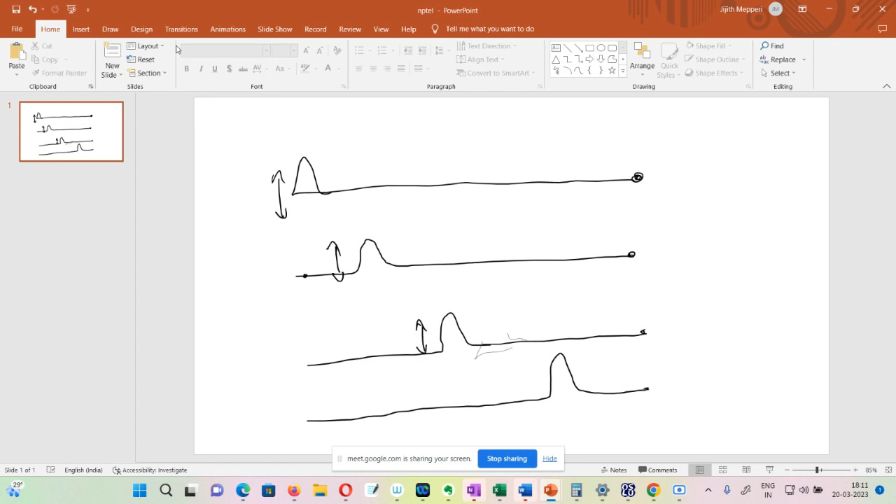What is a plane wave? A plane wave is a wave which is considered such that when it is moving, the whole portion on the plane has the same phase or same amplitude. You can see that - a plane wave, you people know wave, whatever wave - when you are thinking about a wave, everybody will tell about a sine wave kind of thing.

What is it actually representing? You can easily represent it like a wave in a thread or something. But most simple waves can be represented in terms of a sinusoidal wave - either the displacement of a thread, or the variation of pressure, or the variation of stress, or something like that.

So what they are saying is that it has an amplitude part and a propagation direction. And the wave equation is represented by an equation which has both the spatial part as well as the temporal part, the time part. So they are saying that if a wave is moving like that, this point and this point have exactly the same amplitude, and similarly this point and this point have the same amplitude, and the distance between these two portions is what we call the wavelength if it is in the spatial domain.

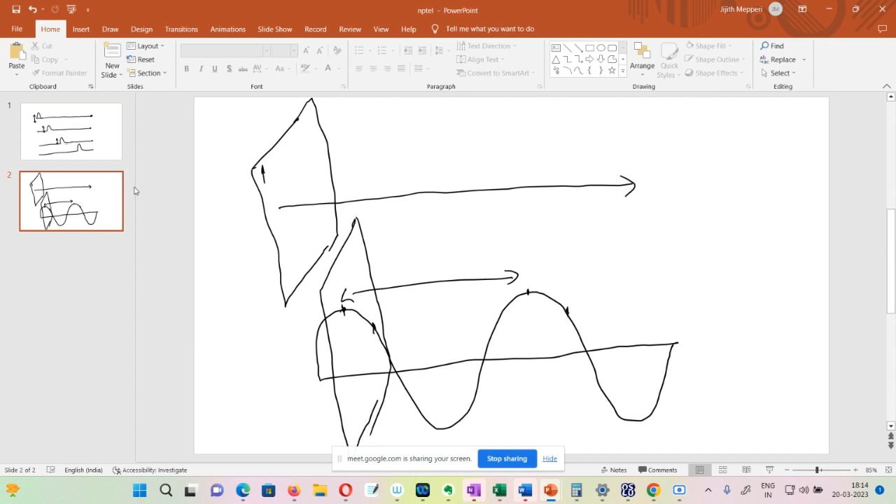So what they are saying is that if it is a plane wave, all portions in that particular plane will have the same amplitude. If this point is in that plane, then everything in this plane will have the same value, and that plane is not fixed by a boundary - it is like an infinite plane, spanning the whole space. So it is a simple entity which we can use, and we can say one plane is moving from one side to another side, like that you can imagine, and that will be easier. But that will not be an ideal situation.

So then other different kinds of waves emerged. This is the plane - so the plane is moving, and it can move like - you can see that when a stone is dropped in a pond, the movement will be circular. Just think that that is happening in space, that will make a sphere. So a wave can move in the shape of a sphere, concentric spheres it can move. So that's the concept of a spherical wave also, which is more towards the real situation.

Then only we are now thinking about Gaussian waves. What are Gaussian waves?

Why is it called Gaussian? Is it the phase distribution that's in Gaussian form? Actually, the phase distribution is not Gaussian. Actually, the cross-sectional amplitude distribution is Gaussian.

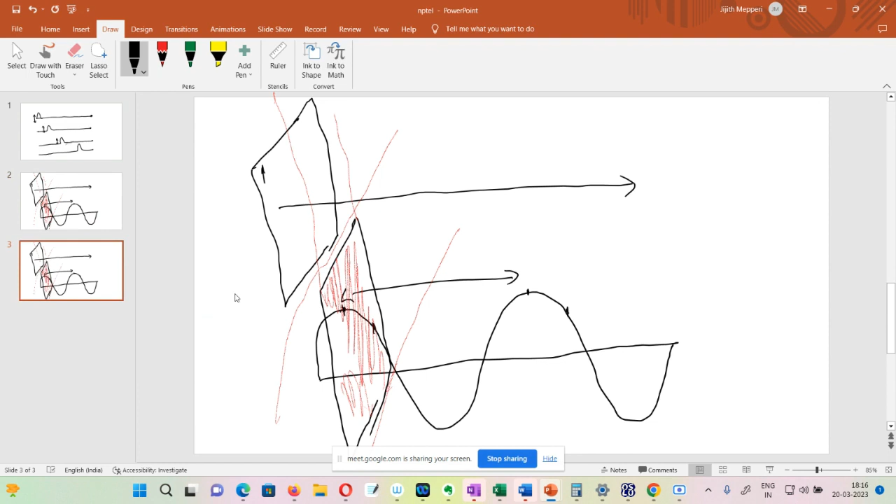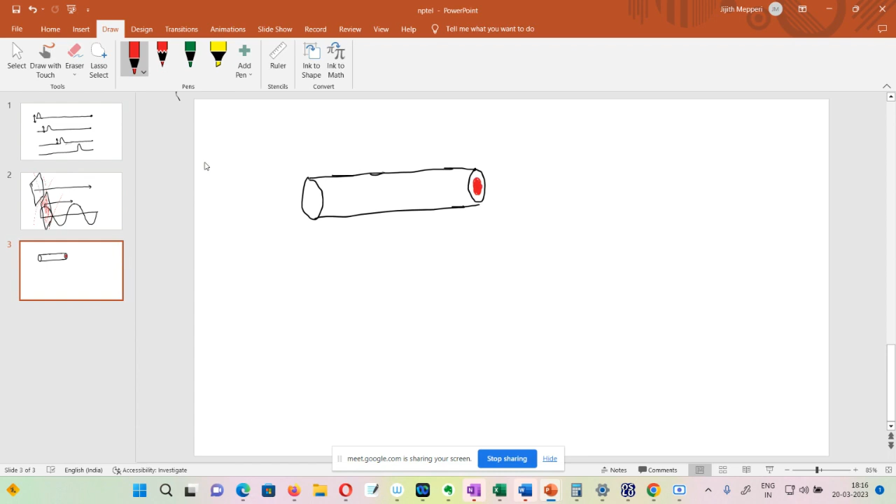You don't need to think too much about waves and other things, just think of a practical concept. You all know a laser beam. And the course said it is Gaussian in nature. Just think that I have a laser diode or laser equipment. It will have an aperture from where the laser is coming. From here, actually, the laser is coming, and a laser beam comes out.

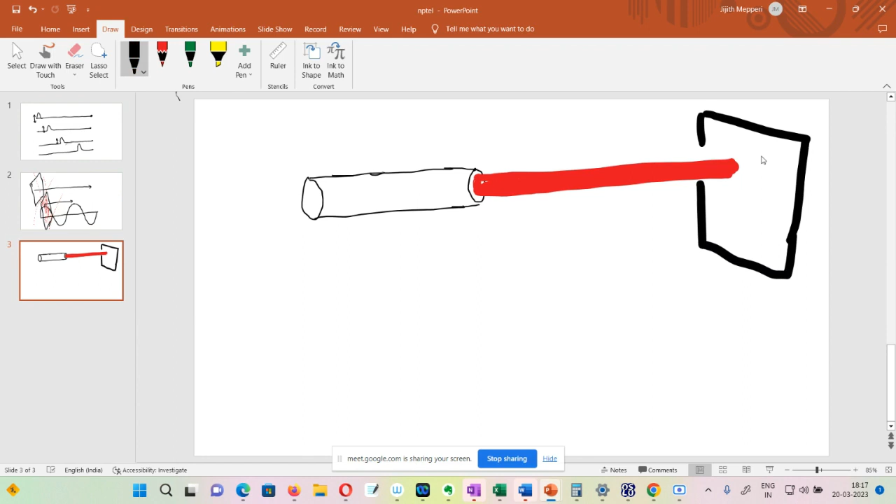You spot it on a paper or something. How does the laser spot look on the paper? If your paper is something like this, you will see some circular spot. This is what you are seeing in the case of a laser beam spotted on paper. But if you look at this spot in a more thorough manner, you will come to know it is not uniform everywhere, like I drew. But look at a laser beam, and you will see it is not going to be a uniform spot.

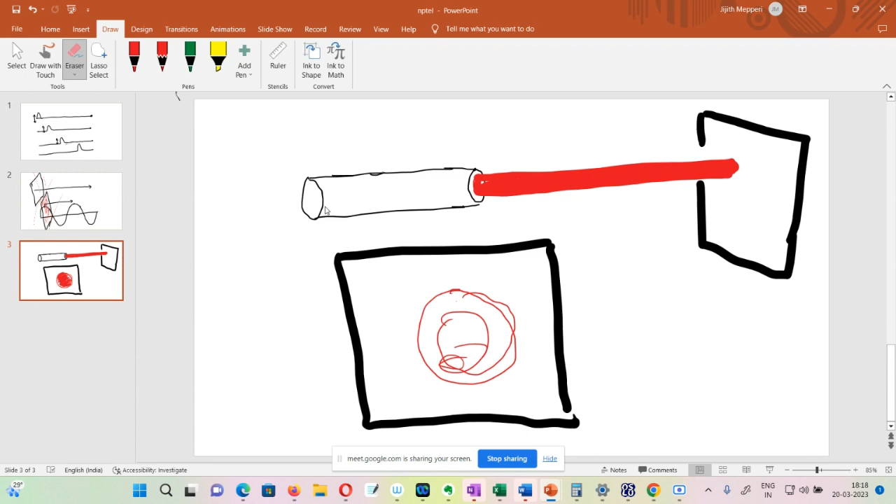You can see that the central portion will be very intense. So when you look at a laser beam coming, or just put it on a paper and see, the central portion will be very thick, meaning very intense. And the outside portion will be less intense, less intense, less intense, like that. It will be something like this.

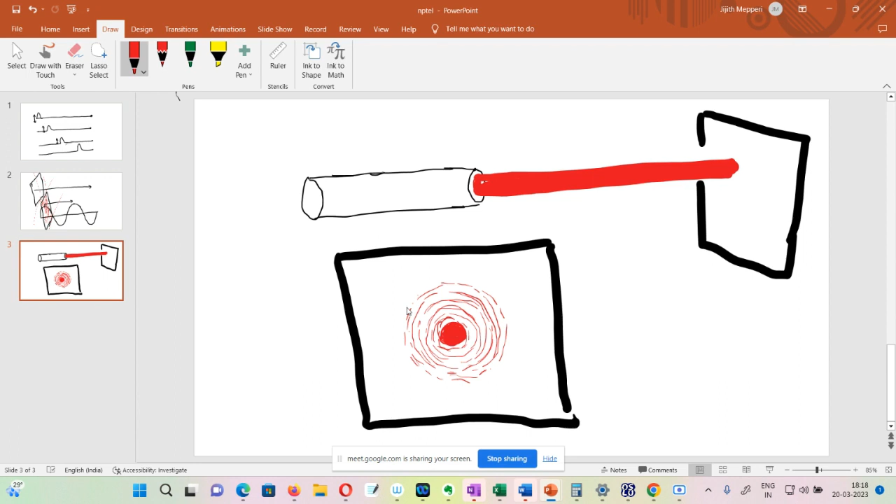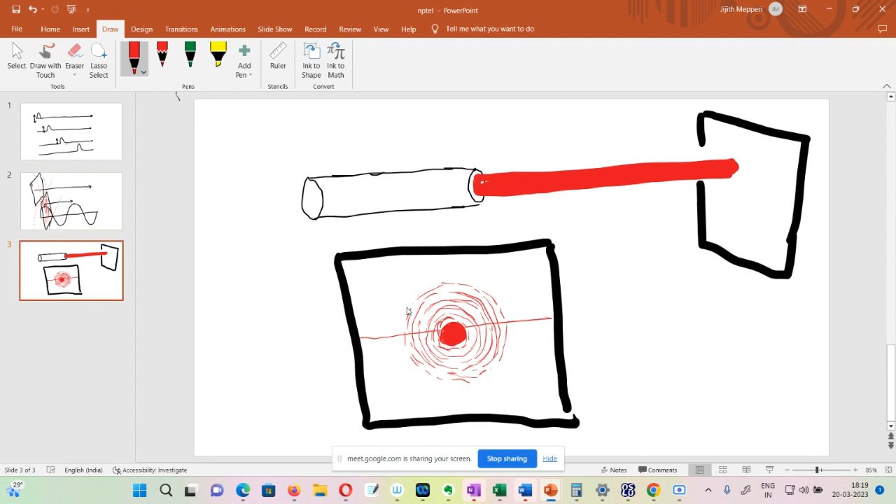Now you calculate the intensity across this spatial direction. What will come? I'm going to plot the intensity across this graph. This is my position: 0, 1, 2, 3, 4, 5, 6, 7, 8, 9, 10. So how will be my intensity at 0? This will be very less. At 1, slight increase. At 2, some more increase. At 3, more. At 4, very intense. At 5, again decreased. At 6, decreased. At 7, decreased. At 8, decreased. At 9, decreased. At 10, it's going like that.

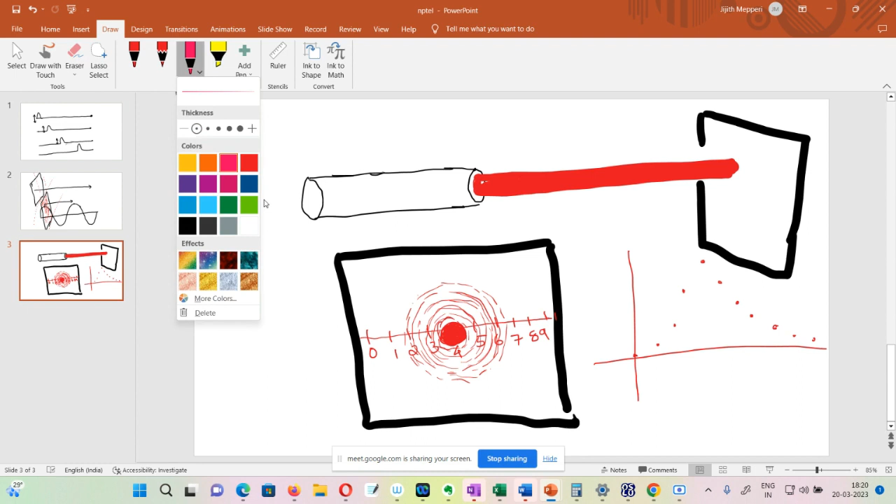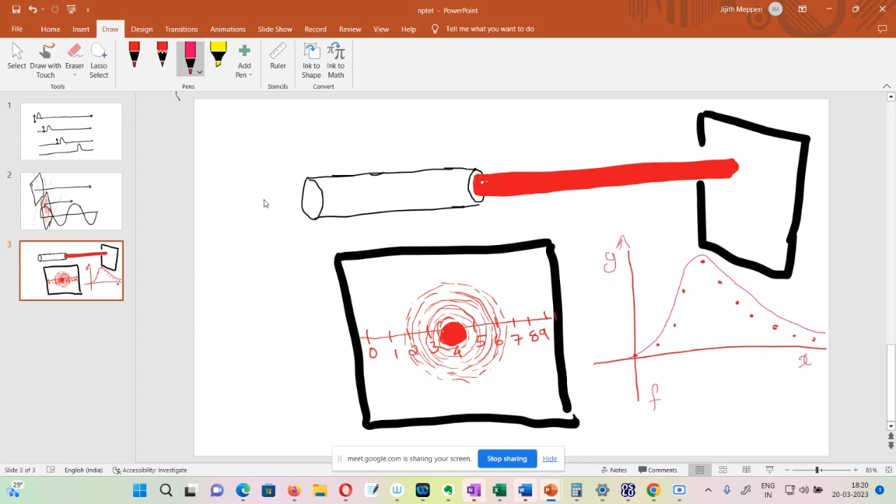And if you connect these points, you will get a shape like this. The intensity variation across the spatial dimension is in this shape, and you can equate this shape with a particular function. This is y and this is x. I can give it as a function like f(x) equals some k into exponential minus a x-squared kind of thing. If you have a function like exponential minus x-squared, the shape will be like this. And this particular shape is called Gaussian.

Why is it called Gaussian? This is actually named in the memory of a famous mathematician called Carl Friedrich Gauss. And this distribution is a very common distribution, so this type of distribution is coming. So your laser beam is in the form of a Gaussian distribution. What is the distribution? The distribution of the intensity or the amplitude of the beam in the spatial direction, or the perpendicular direction, you can say. That is why it is called a Gaussian distribution.

Got it? So it is not the phase that is in the form of Gaussian. It is actually the spatial, or perpendicular spatial, distribution of the intensity or amplitude that is in the form of a Gaussian.

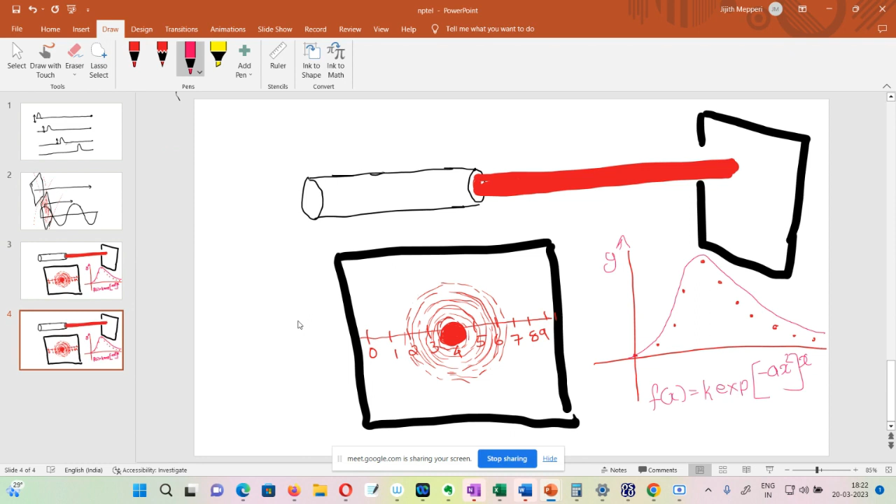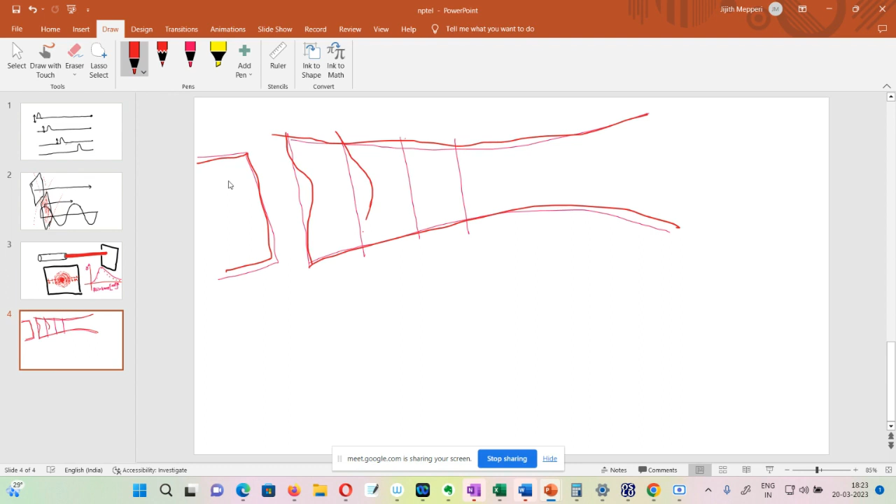Now you can go through the different concepts of a Gaussian, and you can see that the Gaussian beam will have a self-focusing property also. So if it's a Gaussian beam, it will have this kind of profile, and each plane is actually represented by a Gaussian distribution. This is my laser output, and the laser is coming like this way. If you look at a different position, you can see the intensity will be something like this: the middle portion intensity will be high and the end portion intensity will be low. That's the meaning, something like that.

This is the thing of the Gaussian. And we said that there is a plane wave. In the case of a plane wave, we can see that exactly all things are in phase. All the particles in the plane are in phase. But in the case of a Gaussian, there is a phase delay compared with the plane wave. So that is the question which they are asking. In the case of a Gaussian, there will be a phase delay.

So if you're checking that Gaussian beam, you can see that, okay, if the middle portion is something like this, and after some time, if the plane wave is exactly like this, the Gaussian will have a phase delay of something like this. And as it is moving, it will be like something. It will not be this big, but yes, there will be a phase delay. This is the property of a Gaussian beam. And how can we calculate that?

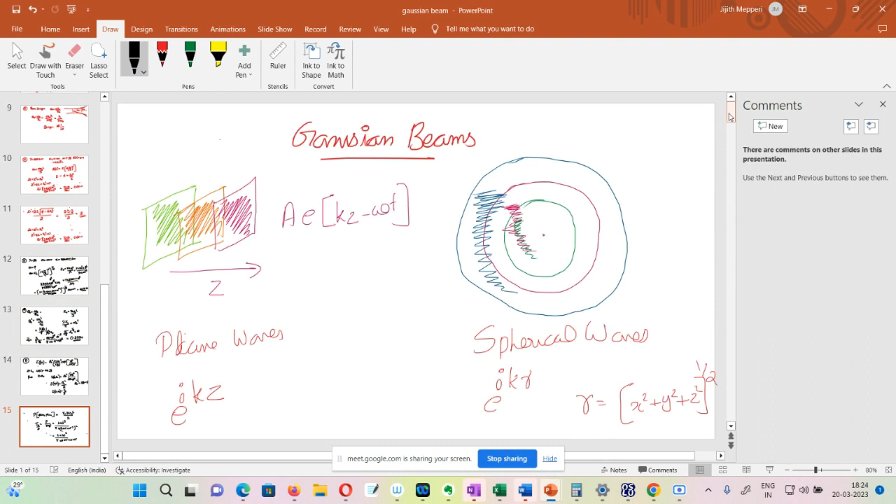So we have the original expression of a Gaussian beam. Okay, what is the original expression of a Gaussian beam? Electric field will be equal to amplitude omega naught by omega z, exponential minus rho square by omega square z, into exponential minus ikz minus ik rho square divided by 2R z plus i zeta z.

Is there any doubt in this portion? You don't need to worry how it is coming and other things. You just have to remember that this is the Gaussian beam expression, this is the amplitude part and this is the phase part. Sir, I had a doubt about what that zeta function does. When ma'am explained, I didn't understand.

Yeah, now there is an ikz minus some rho square by 2Rz, plus that extra term. So what does that do? Yeah, that I'm saying. You see this rho square portion is actually giving the phase distribution along the perpendicular direction. Rho square is actually x square plus y square. Okay, sir. I will tell you.

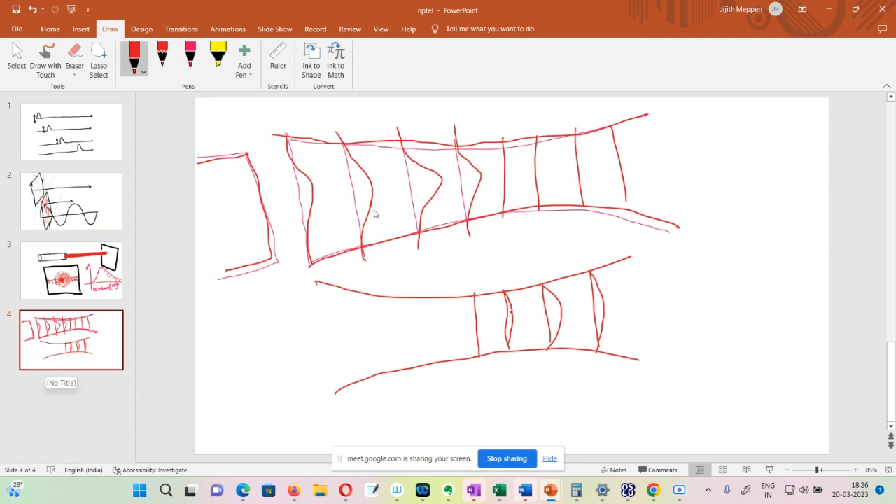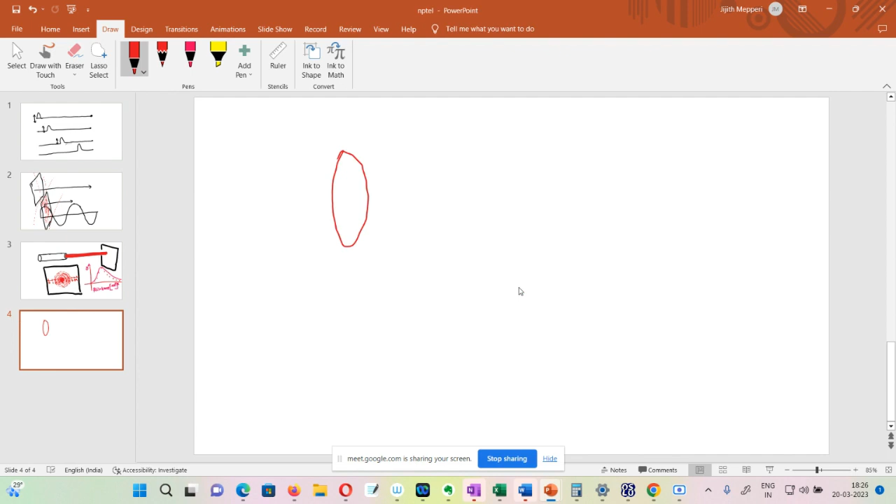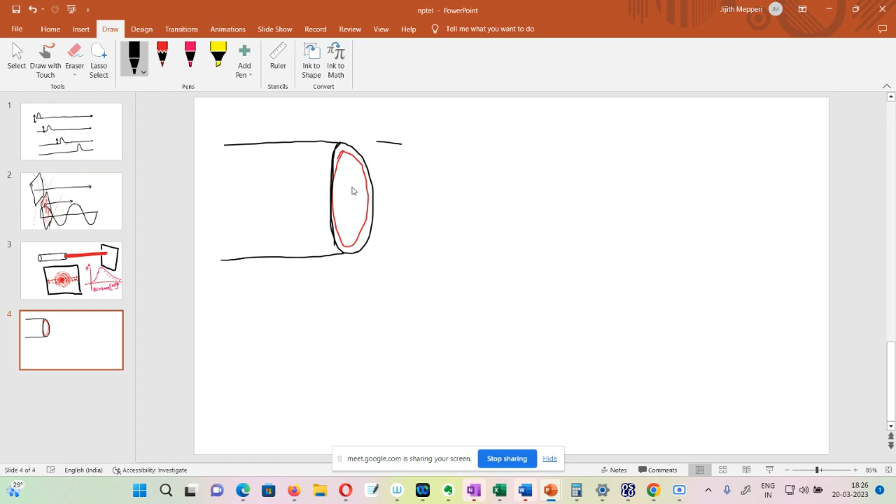Now, this is a laser beam, a laser diode. Okay, this is a laser diode, and a beam is coming from here. It will be like a Gaussian beam, coming this way. And you can see that it will be composed of different planes. One plane, another plane. It's not a separate plane, it's a continuous thing. I'm just saying that you can consider this as different planes.

Okay, and each distribution is a Gaussian distribution. If you take a line here, you can see that this intensity will be higher and the side intensity will be lower. The middle portion intensity will be higher, the side will be lower. Here also like that, and here also like that.

So now you see that this is a full beam just coming out of the laser, but it is like a three-dimensional thing, like a pipe. If you just equate it with a pipe, it has a z directional path as well as an xy directional path. This is the xy directional path. This is the z directional path. Along the pipe it is z, and perpendicular to the pipe it is xy.

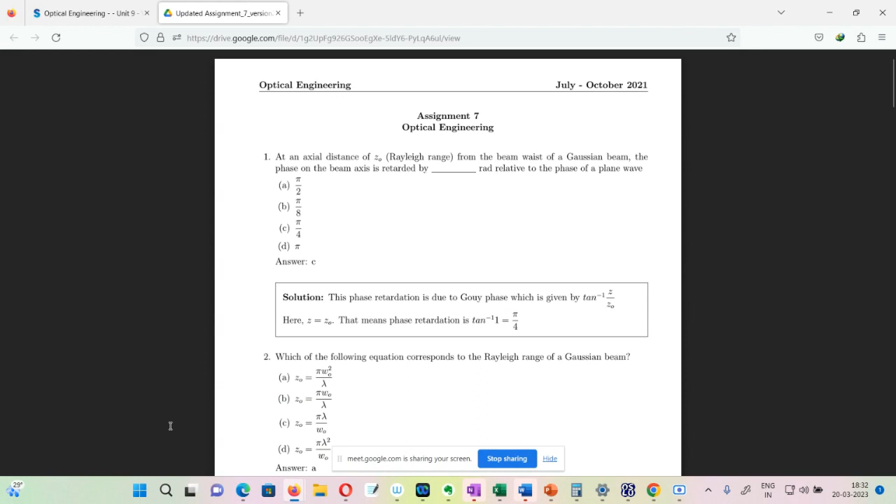Now, which of the following equations corresponds to the Rayleigh range of a Gaussian beam? A Gaussian beam has different parameters, and one of them is its Rayleigh range. What is the Rayleigh range? Rayleigh range is a distance at which you can see the variation of your curvature, a maximum, how a Gaussian beam is changing from a plane wave.

You can see how it changes from plane to spherical, and at a very far away distance it is again like a plane wave, and that variation is characterized by your Rayleigh range. The Rayleigh range is defined as z naught is equal to pi omega naught square divided by lambda. Okay, and now you see

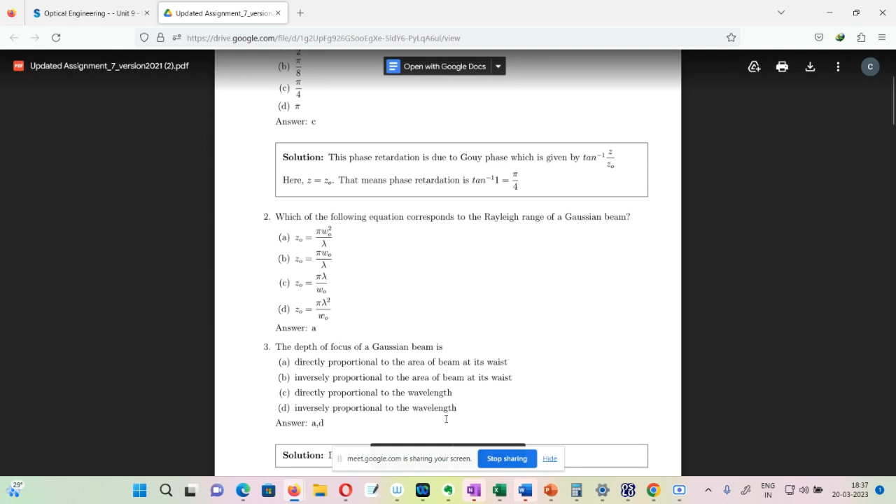So proportional to the area of the beam at its waist, that's true. Inversely proportional to the area, that's false. Directly proportional to the wavelength, that's false. Inversely proportional to the wavelength, that's true. So A and D are true.

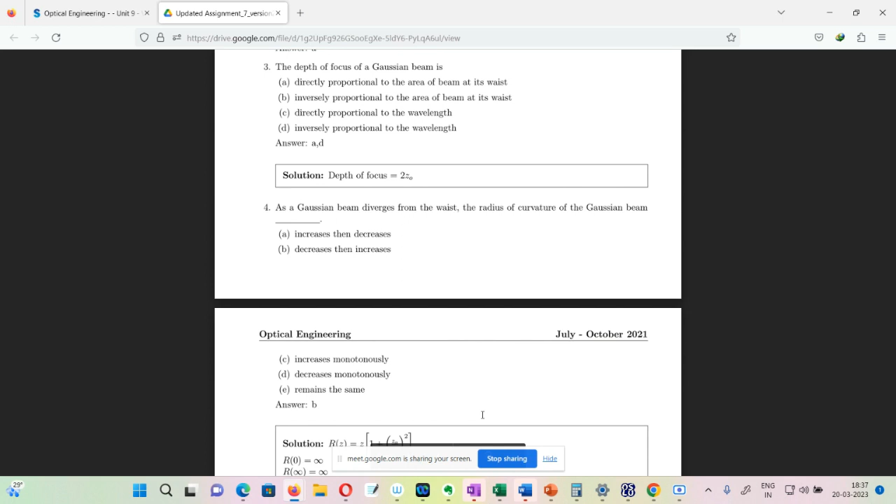Let's see. As a Gaussian beam diverges from its waist, what happens to the radius of curvature of the Gaussian beam? I'm not opening this one. Just tell me, what is the equation of the radius of curvature of a Gaussian beam starting from its focus point, or the beam waist? What is the equation? R of z is equal to z into 1 plus z naught by z, the whole square.

So now, if you want to see how it is happening, you can calculate in a very analytical manner, but you don't have to. If you want to get your answer easily, you can calculate this way. R of z is equal to z into 1 plus z naught by z the whole square. Or you can multiply it out, take the z inside, and it will be z plus z naught square by z. Okay.

Now see what happens at your beam waist, where z is equal to 0. Here it will be 0 plus z naught square by 0, which will be a very big value. Correct? Yes, sir. So it is a very big value plus 0, which is like infinity. So at z equal to 0, R of z is infinity. Radius of curvature is infinity, which means it is a plane.

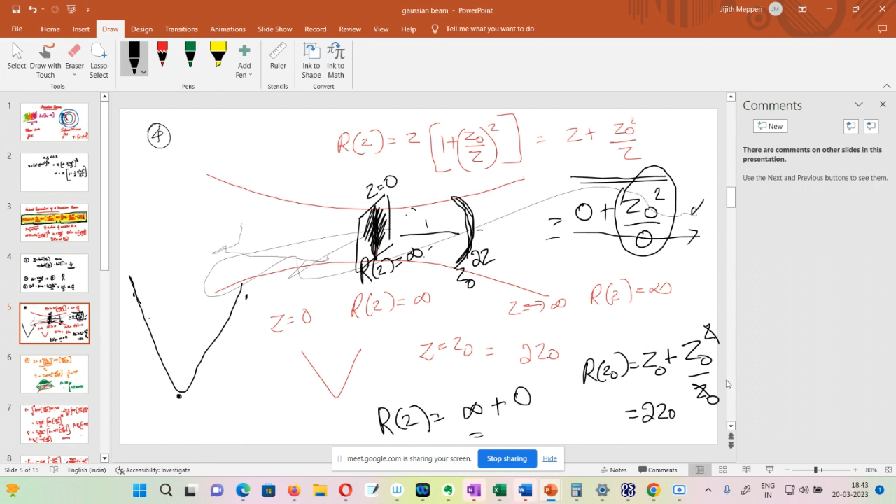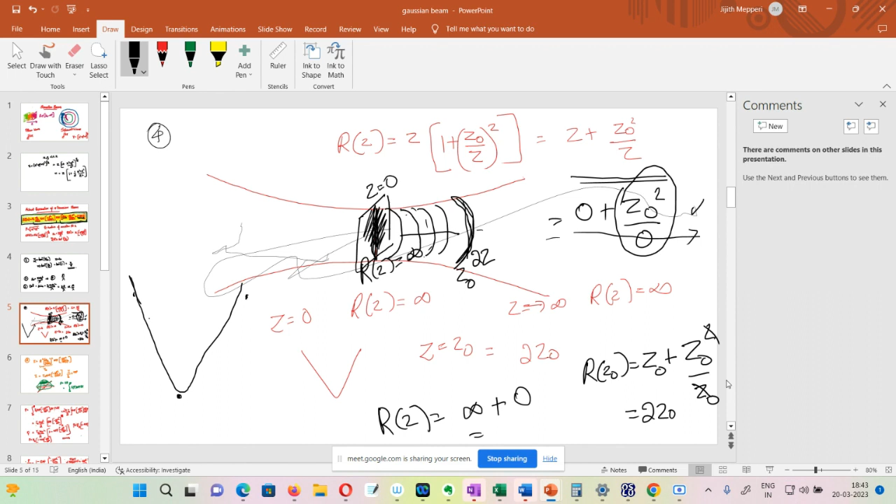Radius of curvature is here. So it will have a plane nature here. Then it will have a very high radius of curvature, and it is decreasing. Then again after some time, what happens? This curvature will again, sorry, increase, and when it is far away, it again looks like a plane.

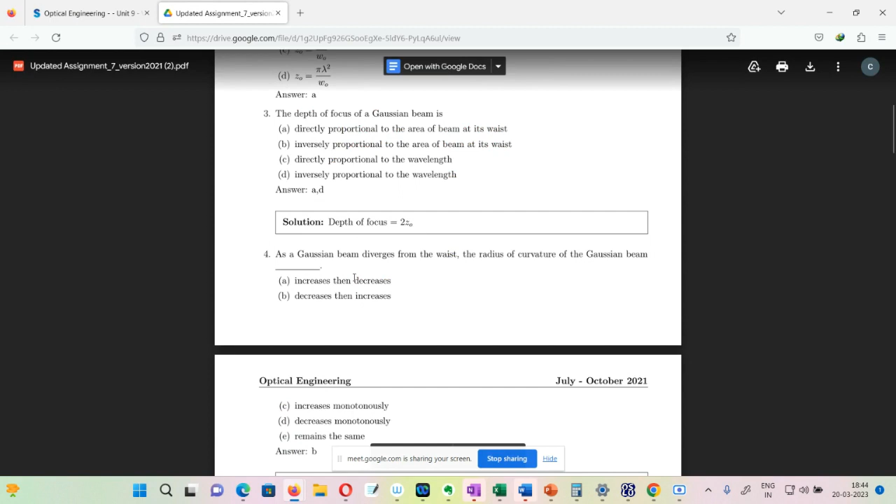So starting from 0, it is plane. Then from high, it will come and go down, and at z naught, it will come to a minimum position. Then again, the radius of curvature starts increasing, and it will become again like a plane. Okay, so fine. So you can see that it increases, decreases, then increases.

Now, from 5 onwards, our mathematics actually starts. The radius of the Gaussian beam within which 99% of its total power is contained. You know how to calculate this one? Actually, it is done in class also, I think. Okay? Yes, sir. That was learned in class.

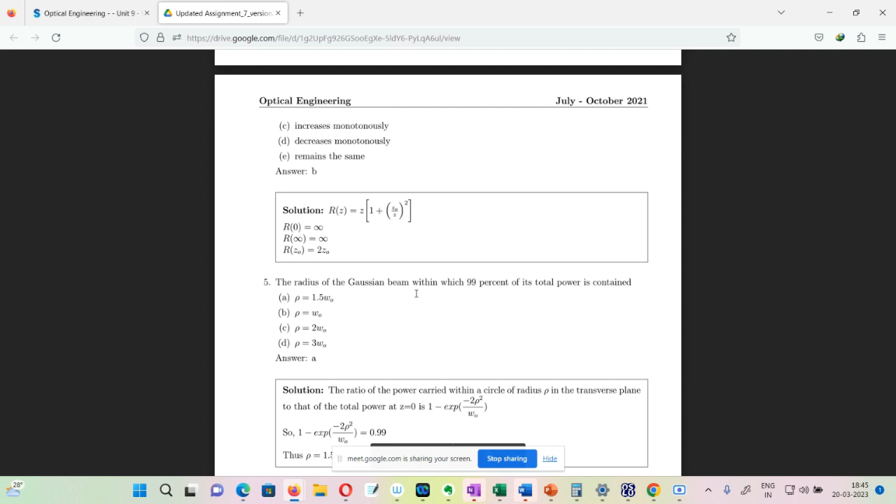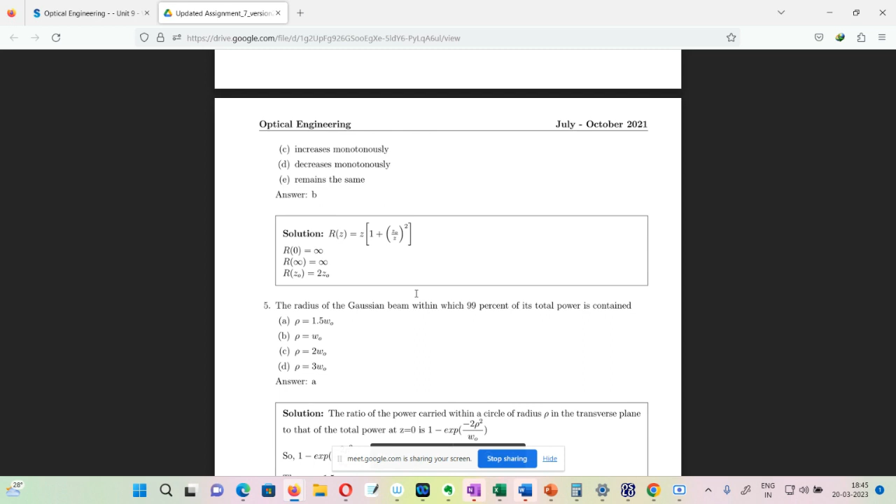Yeah. You want clarification for this one? How the power is calculated, how the 2 pi r is coming? Madam made the calculations and showed, one is 86%, another is 99. Yes. So that is sufficient. Whether I have to explain again, or if you want, I can explain, no problem. Okay, sir.

What is this i? That's the imaginary. This is a complex term actually. This wave function is actually a complex function containing both a real as well as an imaginary part. And you are seeing a beam or laser beam now. Can you actually measure or see how the electric field is behaving? Can we see or detect an electric field?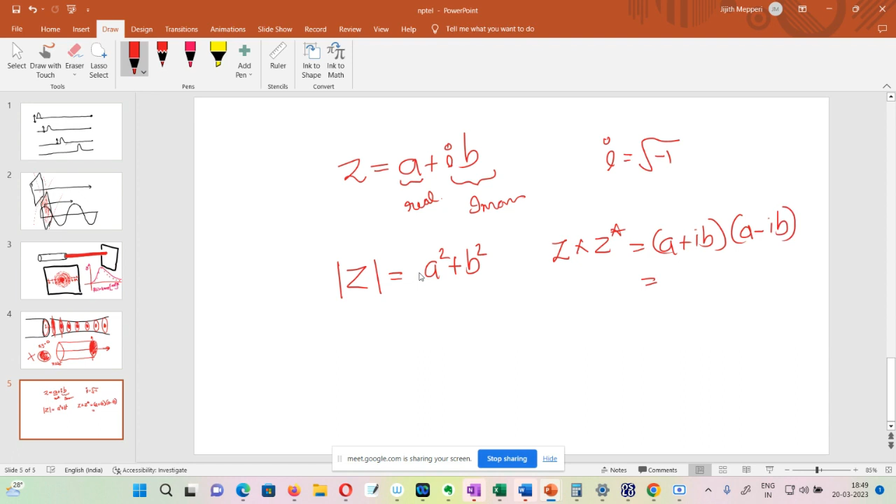So a square minus i square b square, and i square is minus 1, so it becomes a square minus minus 1 b square, which makes a square plus b square. Okay. This is one representation of a complex term. Similarly, there is another representation of a complex term also.

Now the same complex number I can represent in terms of an exponential term. z I can represent as r into e raised to i theta. Okay. A radial representation of this one. And e raised to i theta is cos theta plus i sin theta. Okay. e raised to i theta is equal to cos theta plus i sin theta. Now we just see.

I am saying that I can represent a complex number in terms of r e raised to i theta, and e raised to i theta is equal to cos theta plus i sin theta. So I can write r into cos theta plus i sin theta. So it will be like r cos theta plus i into r sin theta. Now it is looking like a plus ib, correct?

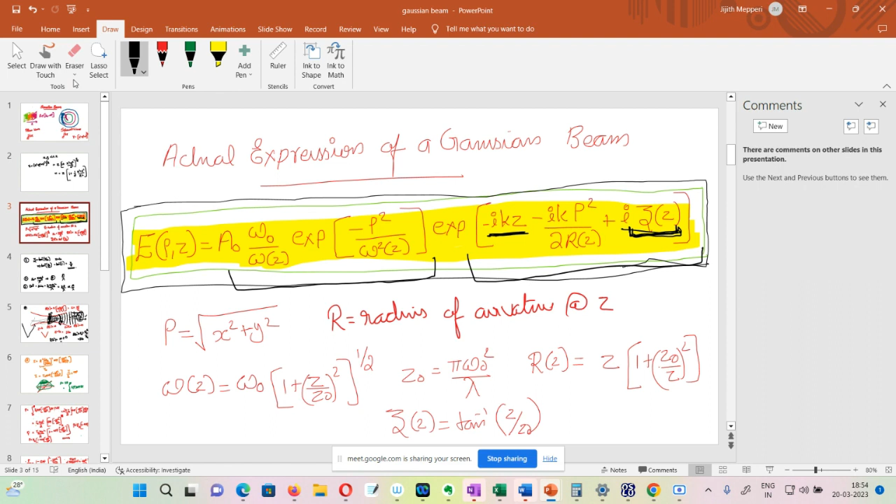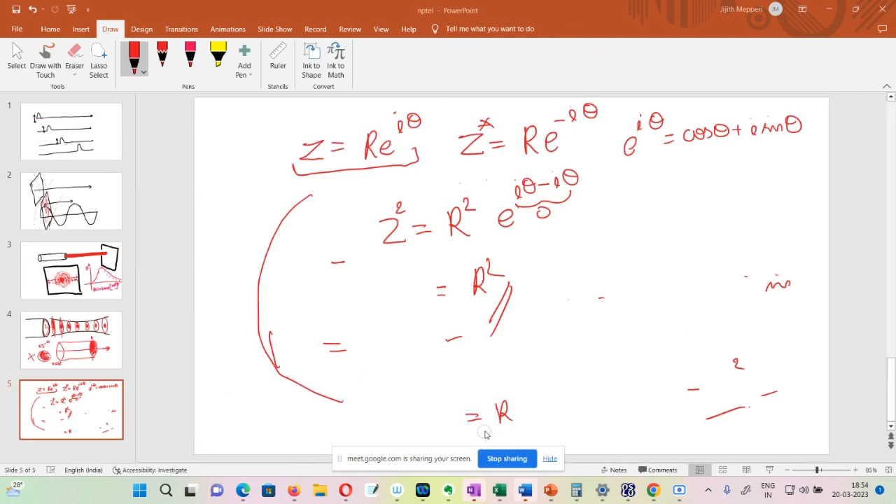So what will happen when you are taking a modulus square? Actually, what is your intensity? Intensity will be E into E star. So this term will be as it is. Now you see, this term will be as it is. What will happen is E star. I took E star of rho, z.

It will be A0 omega naught by omega(z) exponential minus rho square by omega square of z into exponential. What will happen? The sign will change. It will be exponential of ikz plus ik rho square by 2R(z) minus i zeta(z). Now what you have to do? You have to multiply this together.

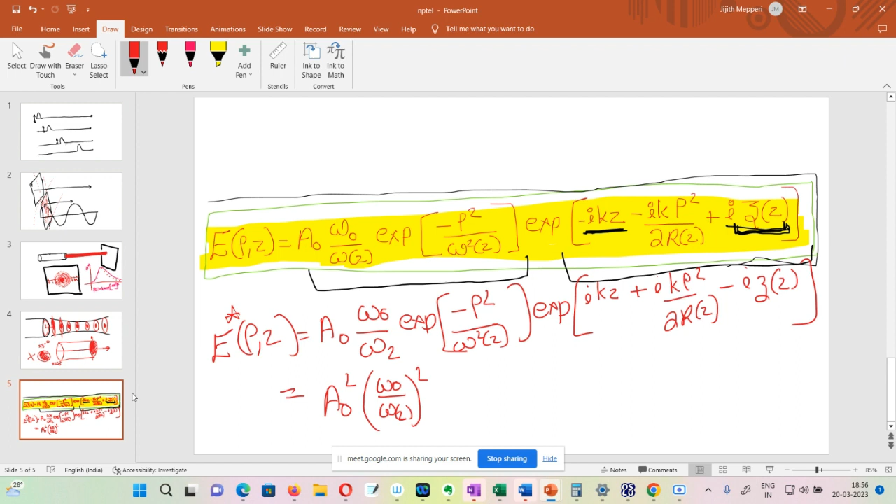What will happen? A naught into A naught will become A naught square. Omega naught by omega(z) into omega naught by omega(z) will become omega naught by omega(z) the whole square. Exponential something into exponential something, the exponent will be multiplied by 2. So exponential of minus 2 rho square by omega(z) square.

What happened in this multiplication? This is minus ikz plus ikz, it will get cancelled. This is minus ik rho square by 2R(z), this is plus ik rho square by 2R(z), that gets cancelled. This is plus i zeta(z), this is minus i zeta(z), this will cancel. And this exponential term will contain an exponential of 0, so that will be 1.

So if you multiply it, if you are taking an intensity, what are you getting? You are getting the square of this amplitude part only. This is actually the real issue which we are facing everywhere. We are saying that all light is traveling in terms of electromagnetic waves or electromagnetic field.

This electromagnetic field is a complex term containing an intensity or amplitude part, which is real, and a phase part, which is imaginary. But our eye or camera detector cannot differentiate this phase part. So whenever you are taking an image, the phase is lost, and whenever you are seeing an image, the phase representation is lost.

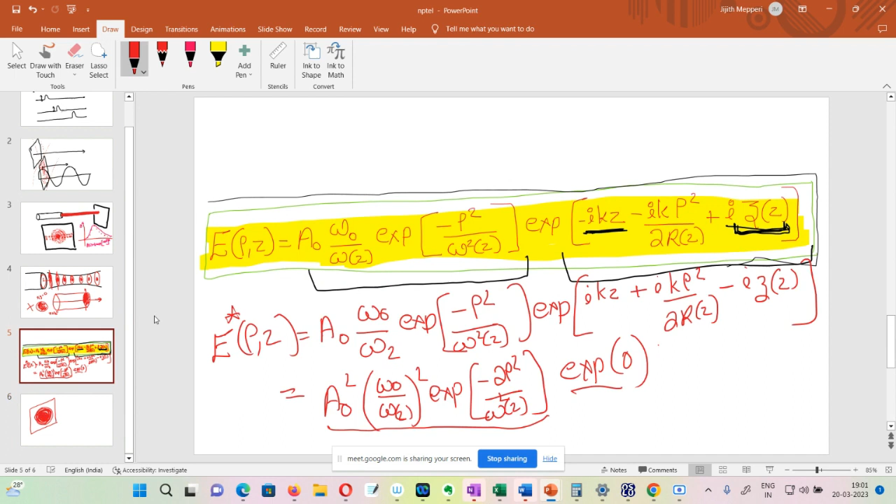This portion will be having a high value, because you can see the rho square by omega naught square z term. So if you have a value of this thing, it contains a lot - this direction is the z direction, and this will be like the x and y direction. Based on the x, y, and z direction, it will have a particular value. If you want the value at this position, take the z value.

If it is actually at the beam waist, then z value will be 0. Sometimes this plane may not be exactly at the beam waist. Just think you are taking a plane at this position, then here the z value will be 0. Now think I am taking a plane at this position - here the z value will not be 0, it will have a particular value, maybe like 2 or 3 or something. So it depends on which plane you are taking, the z value varies.

And depending on what point you are taking, your x and y value will vary. So it will be a function of x, y, and z, and it gives a particular value at a particular point. Got it?

Now you only know the value at a particular point - that's all you are going to know. But now you want to know the full value. What you have to do is calculate this position, this position, this position, like that - you have to calculate the whole position. Actually this is not at all going to end, it's like intensity is decreasing only, it will keep going like infinity.

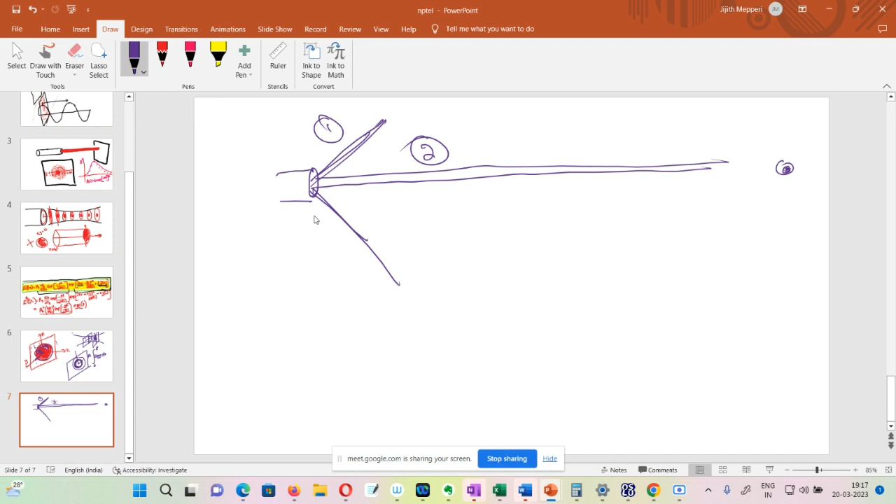Now think that I have a laser beam that diverges. And I want to reach some very far away distance. If the laser is diverging like this way, will it reach there with full power, or if it is very sharp, which is better, this one or this one? The second one. The second one is always better.

So now, what is the difference between this beam and this beam? This beam has a higher divergence, and this beam has a lower divergence. So I want a beam having a lower divergence. Now we can directly go check what is the parameter which decides the divergence. What's the parameter that decides the divergence?

Beam divergence theta is defined as omega naught by z naught. By seeing this, we may think that if we increase omega naught, divergence will increase. If omega naught, or the beam size, is increased, divergence may increase. But no, why? Because there is a z naught here.

Z naught is not a constant. It's a constant for that particular beam, but it is not independent of omega naught. Actually, z naught is equal to pi omega naught square by lambda. So z naught has an omega naught square term.

So it will be like theta naught is equal to omega naught by z naught, or omega naught lambda divided by pi omega naught square. So it will be like lambda by pi omega naught. Lambda is a constant, pi is a constant. Now omega naught is coming at denominator, so theta is inversely proportional to omega naught. By seeing this, don't think theta is directly proportional to omega naught, because z naught contains an omega naught square term. So the net effect is theta is inversely proportional to omega naught.

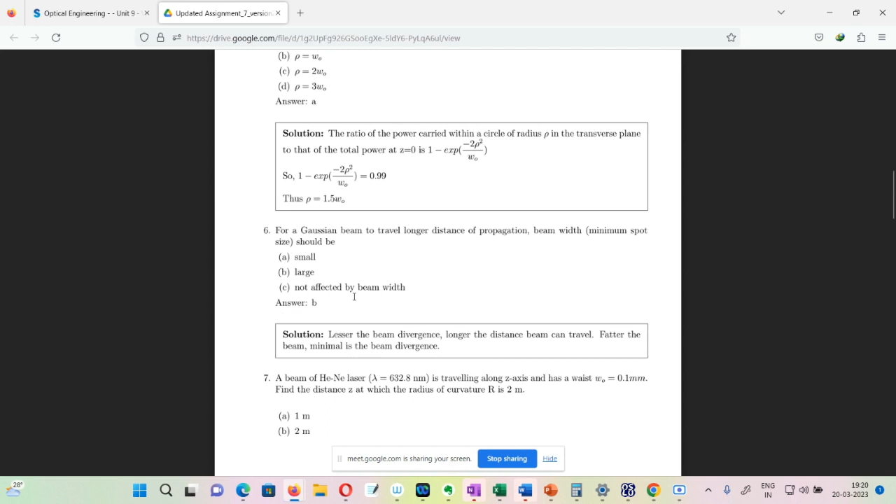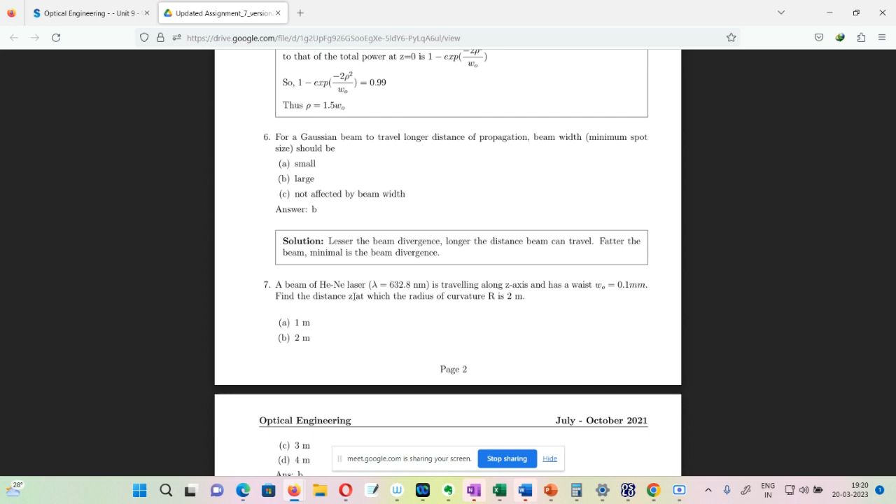A beam of helium neon laser, 632.8 nanometer, travels along a z-axis and has a waist of 0.1 millimeter. Find the distance z at which its radius of curvature R is 2 meters. How will we do this? We have a direct equation. Radius of curvature R is equal to z into 1 plus z naught by z, the whole square. You can directly put that equation there.

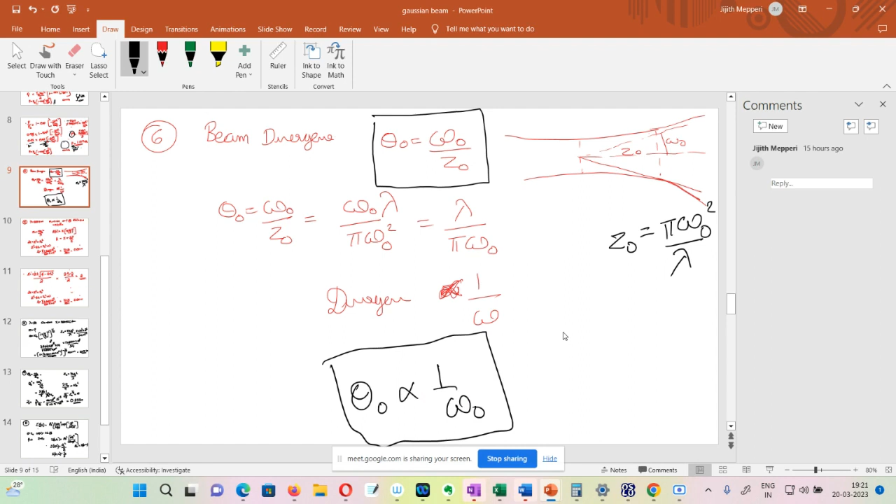Now you see the question. Lambda is given as 632.8. Omega naught is given as 0.1 millimeter, or 0.1 into 10 raised to minus 3 meter. Z we don't know. Radius of curvature is equal to 2 meter. So we have the equation R of z is equal to z into 1 plus z naught by z, the whole square. If you expand it, you get 2 into z is equal to z square plus z naught square. And you can calculate your z naught value, and z naught value comes out as 0.05 meter.

Substitute the whole value there. Z is, this is actually a quadratic equation, correct? If you solve this, if you expand it, you will get a quadratic equation. That is z square minus 2z plus z0 square is equal to 0. This is a quadratic equation, and a quadratic equation will have two roots. How will you find the roots? Z, or the root, will be minus b plus or minus square root of b square minus 4ac, divided by 2a. What are the values?

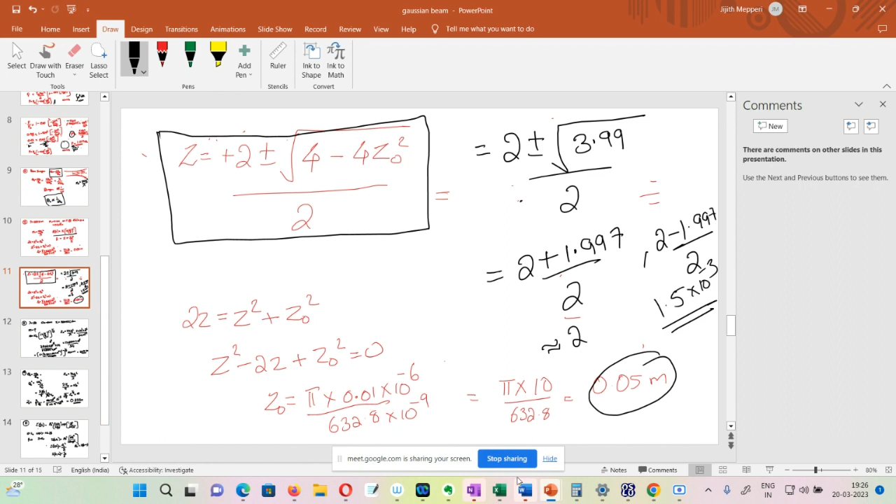Here you can see they are asking radius of curvature. They gave the radius of curvature as 2 at a particular distance. Now you are getting two values. Why? Recall the question we did some time back: when z is equal to 0, the radius of curvature is infinity, at a particular point the radius of curvature is decreasing, and at infinity the radius of curvature is infinity. So it is actually coming down and coming up.

So this is actually the radius of curvature. If you put the radius of curvature along the y-axis, you can see there will always be two values. One point near z is equal to 0 will have a radius of curvature, and the same radius of curvature you will get at a far distance also. So this point as well as this point have the same radius of curvature, and that is where the values came from. One value, 1.5 into 10 raised to minus 3, is very near z is equal to 0. Another is very far away.

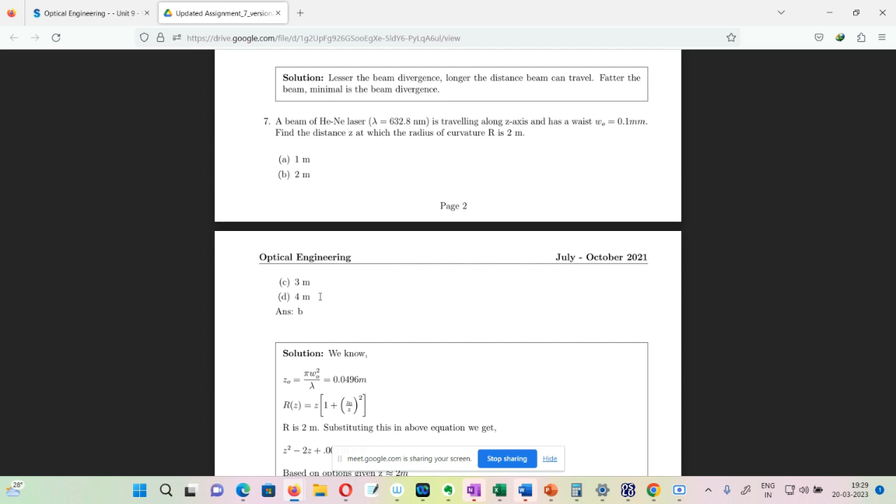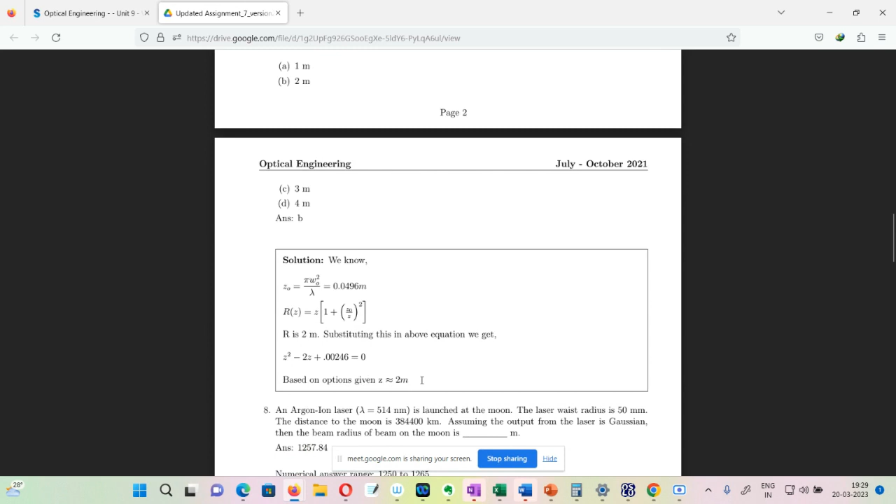So based on the options given, z is equal to 2. But actually z has one more value, and that is not in the options, so you cannot choose it. Actually, z has two values.

Next, an argon laser with a given lambda is launched to the moon. The laser beam waist radius is 50 mm. The distance to the moon is 384400 kilometer. Assuming the output from the laser is Gaussian, the beam radius on the moon is? This is a direct calculation. Omega is equal to omega naught into square root of 1 plus z by z naught whole square.

So lambda is given, omega naught is equal to 50 millimeter, z is equal to 384400 kilometer. We don't know omega, so omega is equal to omega naught into 1 plus z by z naught the whole square raised to half. Z naught we have to calculate as pi into omega naught square by lambda. I directly put the substitution there. If you calculate, you will get 1258.4 meter, so 1.258 kilometer.

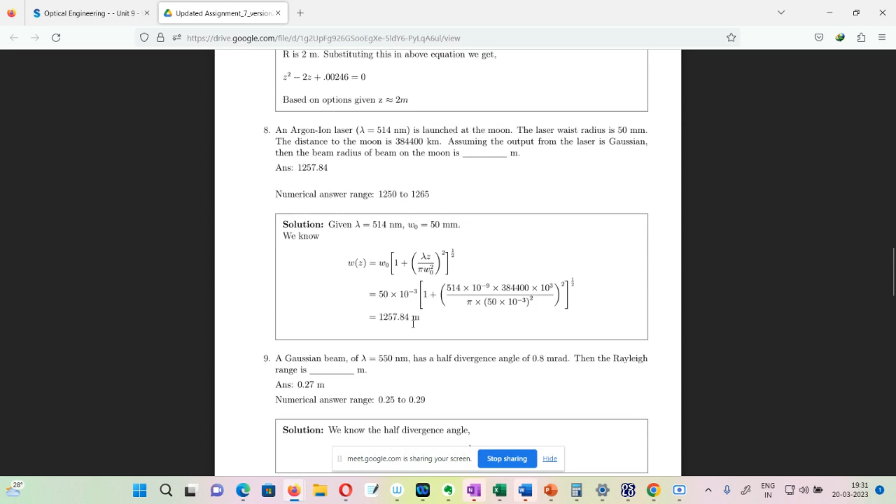Now, the ninth question. For a Gaussian beam, lambda is equal to 550 nanometer, and the half divergence angle is equal to 0.8 milliradian. I have to make sure that it's 0.8 milliradian, 10 raised to minus 3. Then the Rayleigh range is? It's also a direct question.

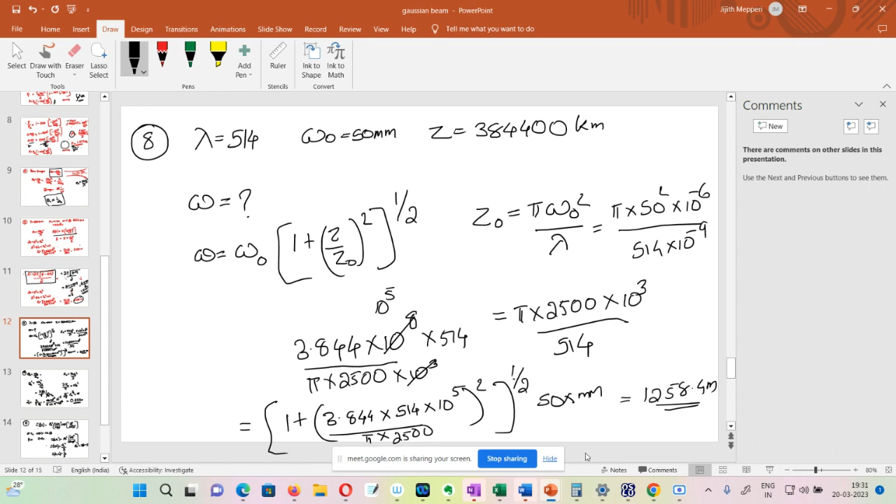This is theta naught. Theta naught is equal to omega naught by z naught. And we have z naught equal to pi omega naught square by lambda. Substitute that there, and what will we get?

You have to do one thing: convert the omega square to a z value. So you calculate omega naught square is equal to lambda z naught by pi, and squaring this one, you will get theta naught square equal to omega naught square by z naught square. What do you want?

Actually, you want the z value, and for omega naught square we have lambda z naught by pi. Put the value there: lambda z naught by pi into 1 by z naught square. It will become 1 by lambda by pi into z naught. So z naught will be equal to lambda by pi into theta naught square.

Theta naught we already know. This is 0.8 milliradian. So substitute the value, and you will get 0.273 meter. Okay. Any doubt in that question?

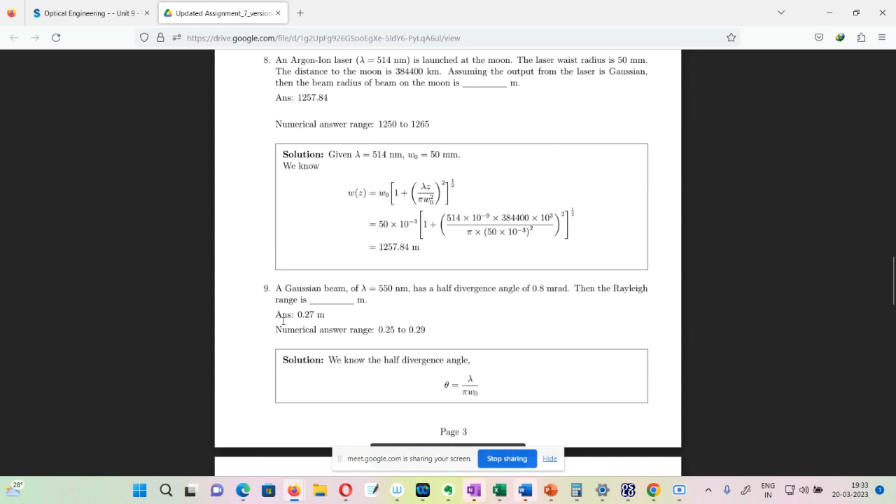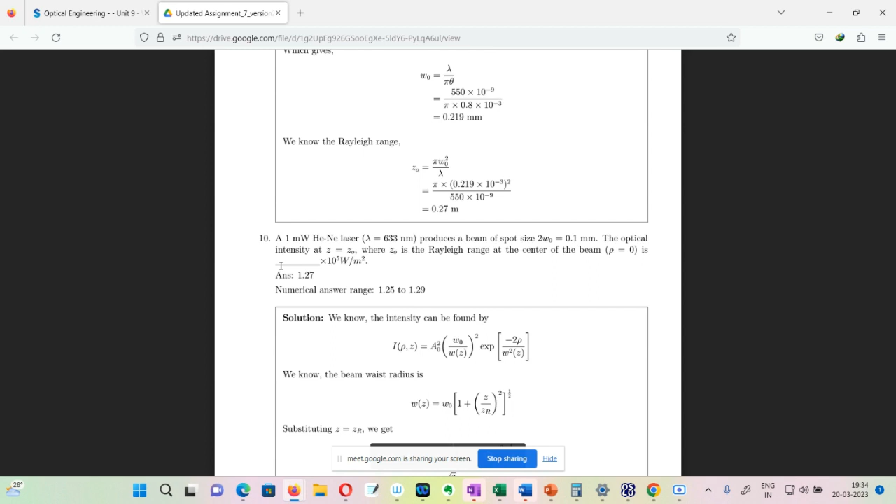Now the 10th question. A 1 milliwatt helium neon laser produces a beam spot size of 2 omega naught equal to 0.1 millimeter. We have to calculate the optical intensity at z equal to z naught, at the center of the beam. Okay. Check the answer. Now we can see the intensity.

There is a chance that you will misrepresent the intensity as a whole thing, but make sure that the intensity function is actually a point function. It gives the intensity at each point, not as a whole. So you cannot multiply intensity by the area and get the power, because the intensity is not constant throughout the plane. Only if the intensity is constant throughout the plane can you multiply. Otherwise you have to do an integration. Okay.

Now you see, this is the question. We already have the equation of intensity. Intensity is equal to A naught square by omega z whole square, exponential minus 2 rho square by omega z whole square. And they have given z as z naught, and in that case omega z will become omega naught into root 2.

Omega is equal to omega naught into 1 plus z by z naught whole square raised to half. So when z is equal to z naught, it will become 2 raised to half, so it will be root 2 omega naught. Substitute that value here. At the center position, rho is equal to 0. Put rho equal to 0, and this whole exponential term will become 1.

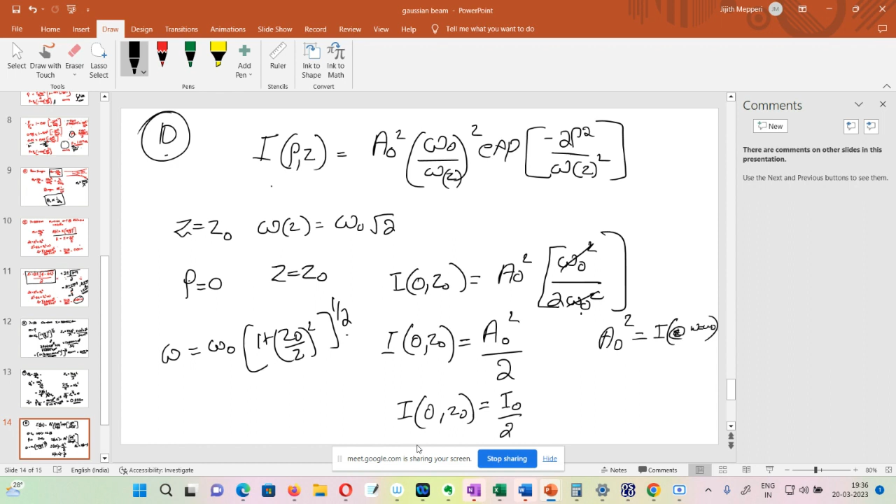As I said, we cannot directly multiply the power and area because the intensity is not constant. Now we already have the power at the omega naught plane. This is what we calculated in our integration. I naught by 2 into pi omega naught square will be the total power of the laser beam. And that power will be constant.

So what I want now is I naught by 2. See, here I naught by 2 is already there. So it will be power divided by pi omega naught square. Power is already given as 1 milliwatt. And omega naught is 0.05 into 10 raised to minus 3, because they have given the beam width as 0.1, so omega naught, the beam radius, will be half of that.

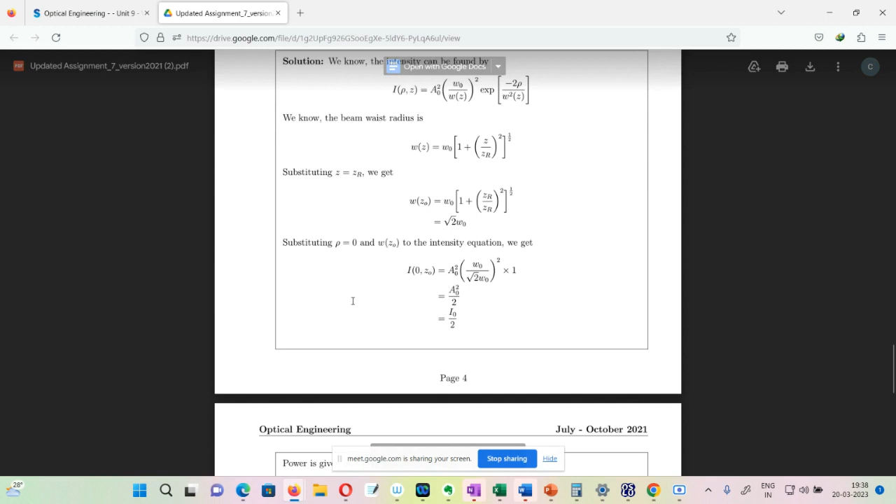That is 0.05 millimeter, so we have to multiply by 10 raised to minus 3. Take the square and do the calculation. You will get the answer as 1.27 into 10 raised to 5. Okay. And for this one? That is right, correct.

So these are the assignment questions solved. Now new assignments are coming, on how Gaussian beams transform and other things. It is much more involved, because you have to put in more effort. Just by logic, you cannot get all the answers.

Optics is much simpler in the sense that we can just think, calculations are much less and equations are very few. You can just get an idea, think about how it is happening, and you will get almost all the answers. But here you have to think a little bit more. That difficulty is there.

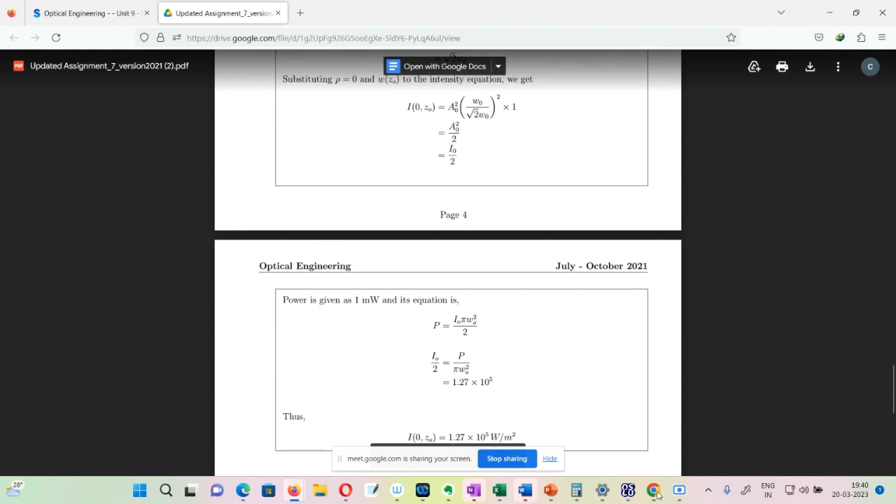So what are the other doubts you can ask, such that you can see what are the difficulties or some other things you people are facing? If you people are facing any small problem also, you can tell. I don't have any issue trying to solve it. Yeah, anybody giving comments? I'm not listening.

Sir, I had a doubt in the week 8 lectures. It was related to the Q parameter. Okay, that's when it is going through the lens? Yes, sir. How did that Q parameter come? I felt it was sudden. Okay, I'll check and tell, because I didn't get it. Okay, fine.

Okay, you do one thing. You just ask it in the group so that I can answer it. Okay, fine. I'll send a mail, sir. Yeah. Hello, sir. Can you please again explain question number 4? Yes.

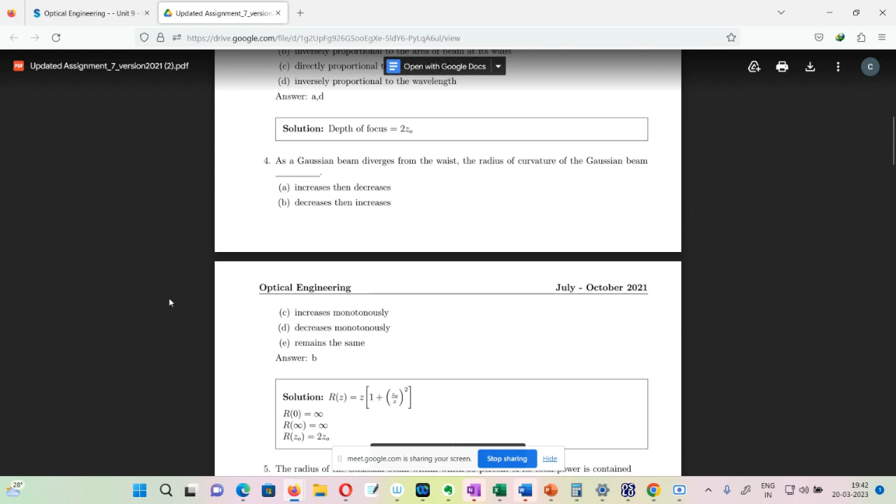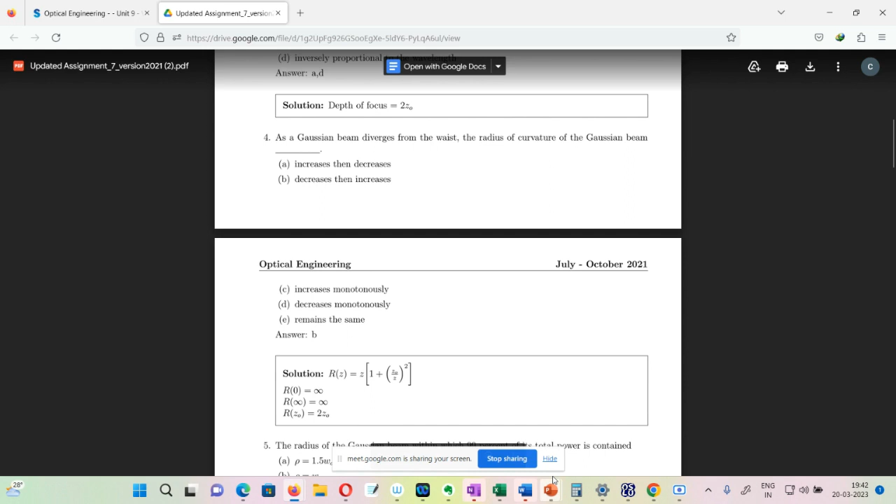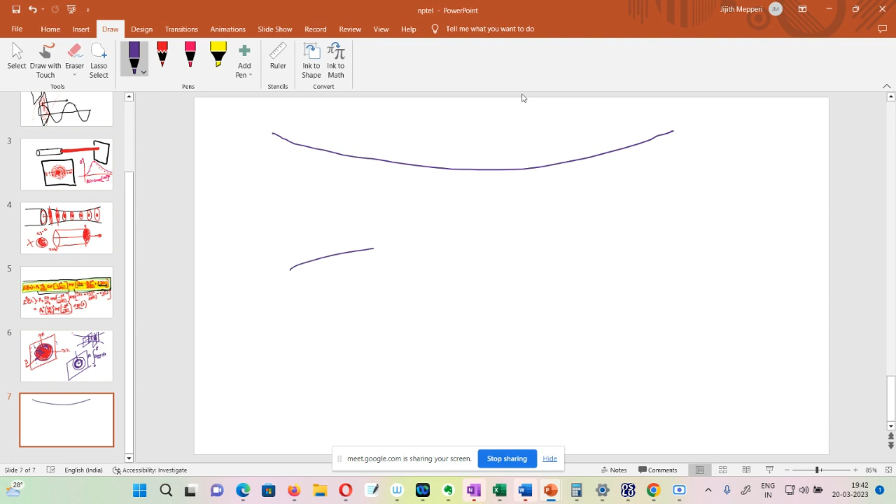Okay, you see, a Gaussian beam diverges from the waist. What is the nature or the behavior of the Gaussian beam radius of curvature? So this is a Gaussian beam, and this will be the beam waist. What is actually meant by radius of curvature? Just think that you have a light bulb emitting some light. How will it look? The light waves coming will look like a sphere, concentric spheres.

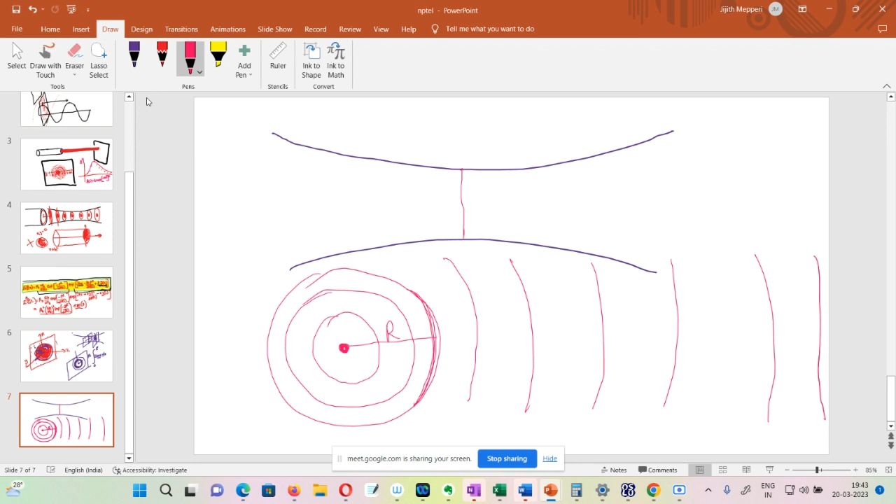It will be like a concentric sphere, and the sphere will have a curvature, and the corresponding radius is called radius of curvature. Now, when it is very far away, what happens? It will be very big, and very far away it will look like a plane. So if it is planar in nature, we can say the radius of curvature is infinite. When it is more circular, it will have a finite radius of curvature.

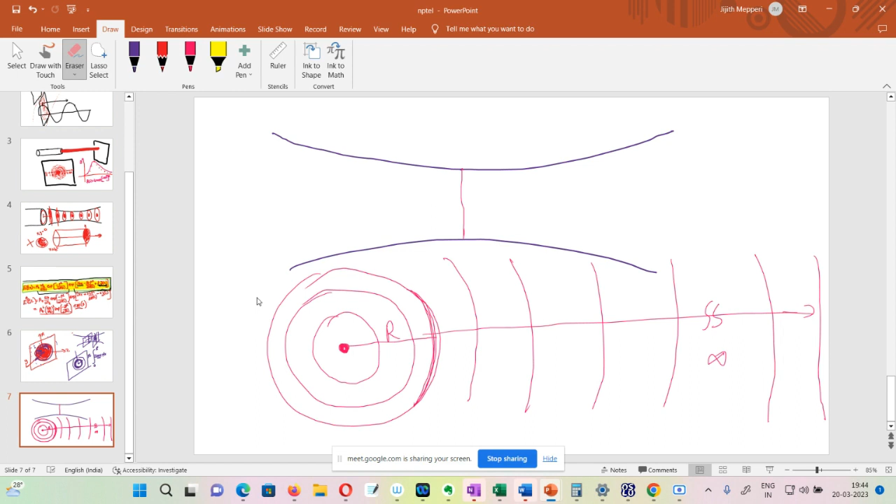This is the funda. Now, a Gaussian beam will also have a radius of curvature. At each plane, at a particular distance, it will have a different radius of curvature. We have an equation to calculate that. For the Gaussian beam, the radius of curvature is defined as R(z) = z[1 + (z0/z)²].

So what is it giving? It gives a function saying, when moving from z = 0 to z = z0, how the radius of curvature is changing. Now we want to calculate how it is changing. Our initial position always starts at the center, the beam waist. That position is called z = 0. So I want to see what the radius of curvature is at z = 0.

This equation I can expand and write as z + z0²/z. Correct? Any doubt with this representation? Now at z = 0, this becomes 0 + z0²/z, which is like z0² divided by 0. Actually you should not write it this way; we have to represent it in terms of a limit. But for representation and analysis, I am just putting it like this.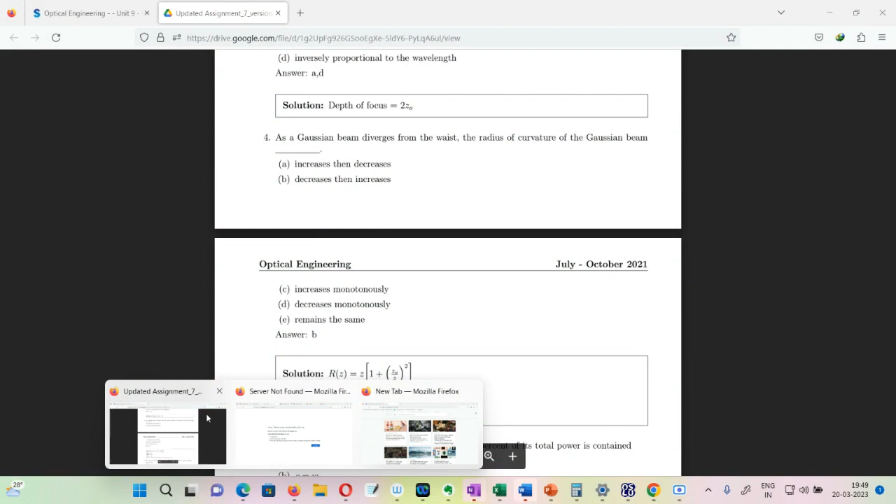Okay. Yes, sir. Thank you, sir. Any other doubt?

Sir, I had one doubt in OSLO, sir. I didn't understand the difference between the base coordinate system and the global coordinate system. Yeah, actually the local coordinate system is what they are doing in that exercise. You may have repeated and did the same thing. Yes, sir, but they were saying one is local coordinate system and then what is the base coordinate system? Is it the same as the global coordinate system or is it different? I think they are fixing one coordinate and based on that one they are calculating. The rest actually I didn't go through that much. Okay, you put it in the group also so that I can go through it.

I'll do it. In the global coordinate system, actually they are fixing one coordinate as the global coordinate, and all the other things you have to define your coordinates from it. So you are directly defining every coordinate such that it will take the value. In the local one, actually, based on one coordinate you are defining the other one. That's the way it normally goes. Yes, sir. Okay.